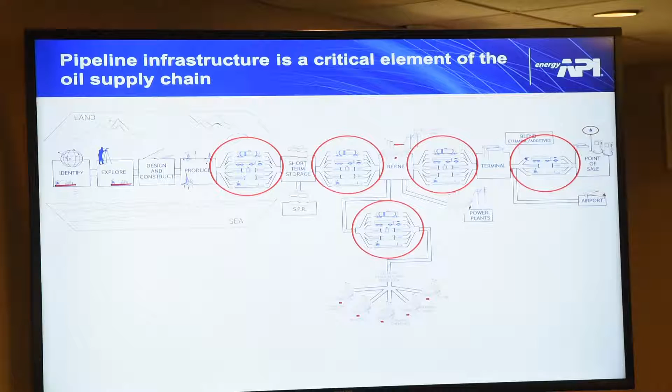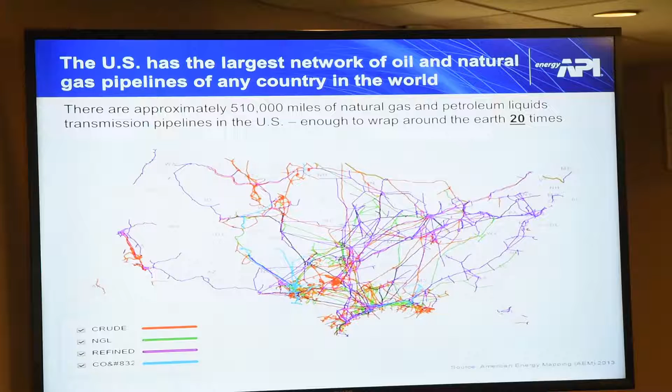Why pipelines? Pipelines are the only feasible method for transporting the vast quantities of petroleum products America requires. They're safe and efficient, highly cost effective. Replacing even a modest-sized pipeline—say a 20-inch pipeline—would require 750 tanker truckloads per day, at a frequency of one load every 2 minutes, working around the clock.

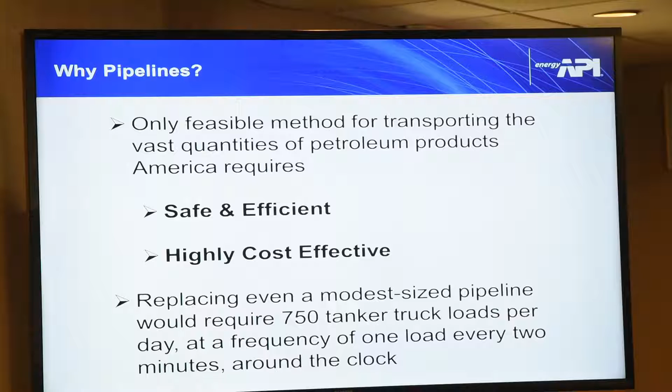In 2014 we shipped 16 billion barrels of oil throughout the pipelines here in the U.S. To give you an idea, there's just a ton of gas and crude oil moving through the pipelines under the ground across the nation. How do pipelines work?

There are a number of different products that are shipped through the pipelines. They use centrifugal pumps to move the liquid through the pipe. Some very intelligent gentlemen came up with the principles of hydraulics and figured out how to put these batches into the pipeline and get them to the delivery points and separate them. Product moves at approximately 3 to 8 miles per hour, depending on the size of the pipe, line pressure, and the density and viscosity of the liquid being transported.

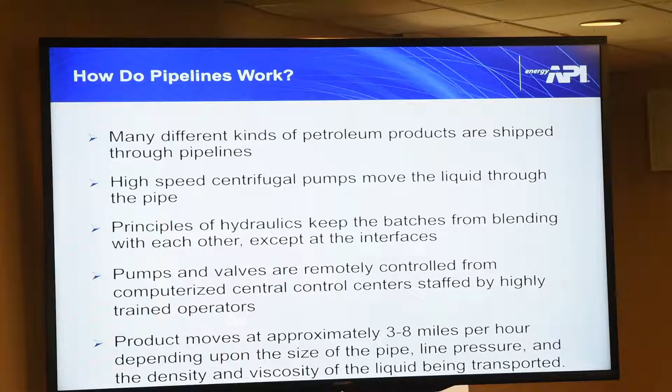This slide shows a little graph of what a batch looks like in a typical pipeline. You can see your different fuels, the premium, the regular, your home heating oil, as well as jet fuel and diesel fuel. That's how the batches work. They ship it stacked on top of each other down the pipeline, and when they get it to the terminal, they can pull it out and keep, for the most part, everything separated except for those interface areas and the transmix, and most terminals can take that out, break it apart, and put it in the proper tanks.

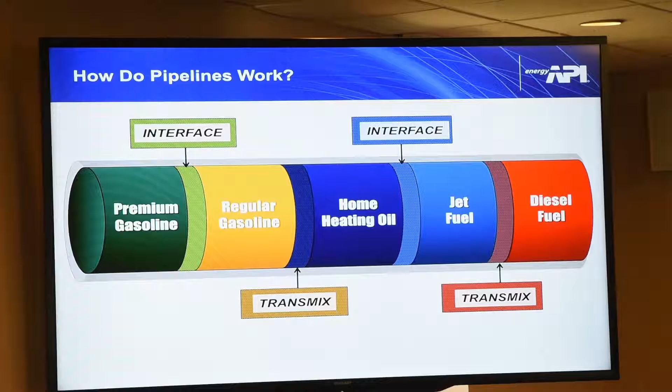Maintaining pipeline operations, the industry does a lot to work on prevention, mitigation, and response. There's constant monitoring of the pipelines. Sometimes it's just somebody watching around the clock from a computer control room. Other times it's air inspections from airplanes, or we're starting to use drones along the pipeline routes. Other times it's folks out there walking the pipeline routes looking for any type of easement or encroachment.

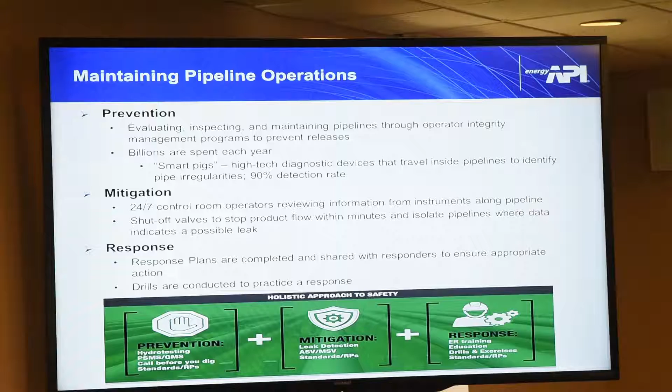We do mitigation and response. We're constantly working with safety and emergency responders to stay up to date and on top of any emergencies that might occur, just so everybody's on the same page and used to the drill.

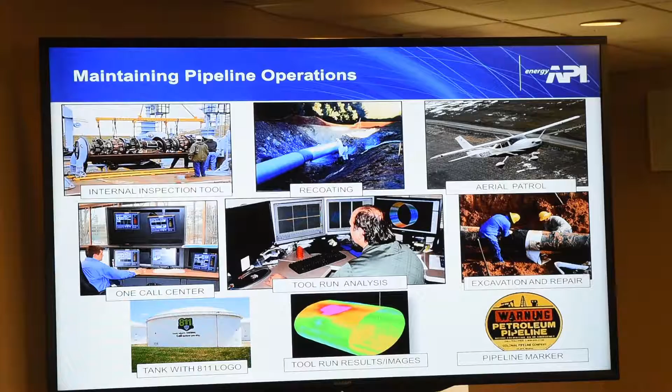These are just some pictures of some of the different ways. We have internal inspection tools called Smart Pigs. We might go in and do some recoating in certain areas. Aerial patrols, we have signs, the control room, all that kind of stuff. There are a number of different things that the industry does on a regular basis to make sure we keep this important part of our energy infrastructure running safely and as efficiently as possible.

From the regulatory oversight, FERC, the Federal Energy Regulatory Commission, oversees pipelines regarding rates. The Pipeline and Hazardous Materials Safety Administration, part of the USDOT, regulates us for safety. We also work with the Environmental Protection Agency and OSHA and various other state and federal entities. I do want to point out that we work extremely closely with the Department of Energy, the Department of Defense, and the Department of Homeland Security, because most of our pipelines are a very critical part of our energy infrastructure, and in some cases could be a target for terroristic attack and stuff like that.

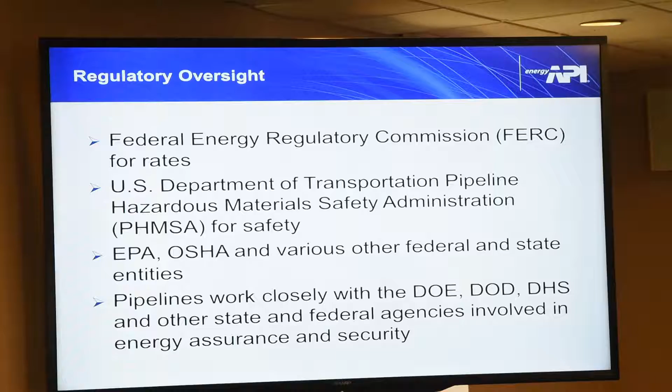So usually when stuff goes down, our folks are on high alert regarding national security.

In summary, as you can see, pipelines are a critical element of the oil supply chain. They're the safest way to transport large amounts of petroleum products. Our regulatory oversight is both on the federal and state levels, and you can also see that Georgia has a long history with petroleum pipelines. They've been around for a long time, servicing the industries here in the state and supplying all the motorists of the state of Georgia.

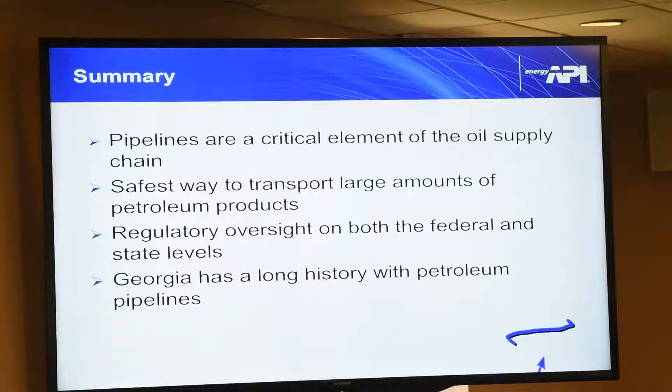I was told that right now, because there is no pipeline that goes from Augusta down to Savannah down to the coast, some of this product is brought in through the port on ships. I guess you basically put it on a ship over in Texas and Louisiana, and float it around Florida to our port of Savannah. From there, it has to be put on trucks and taken inland.

Also, the other way you get oil to that part of our state where there's not pipelines is that you've got to put it on trucks in Macon, or wherever the terminals are, Macon, Augusta area, and bring it down that way.

So the question was asked to me: if we did run this pipeline off the existing pipeline, would the bringing of oil into the port dry up a little bit, because now you have a more or less expensive way to supply it to that area? It was asked for this reason, because the arteries that supply oil to Georgia, one being through the port, purportedly increased to bring in more to substitute for the pipeline being broke. In other words, there's a second distribution method and point there. The question was, would those dry up when the pipeline came off, so that if you had a big break in those two pipelines, you would have less oil in that part of Georgia or not? I didn't know the answer to that. I don't even know if you know the answer, but it was posed.